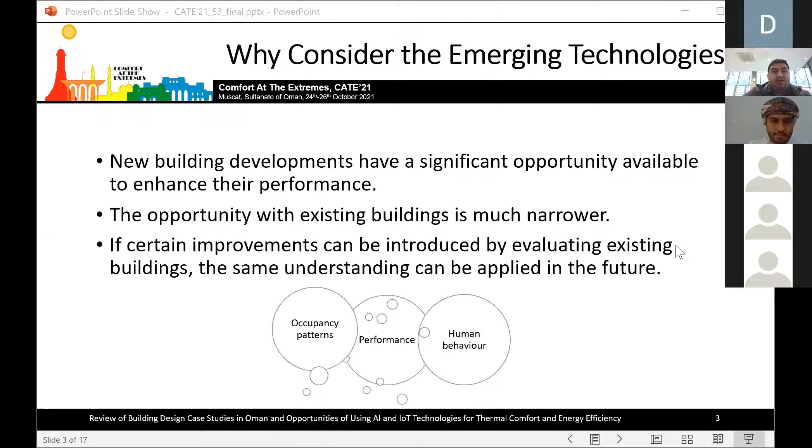So how about the past? Yesterday, John Norton presented what I can call a historical snapshot from his research in 1975. He and his colleagues traveled throughout Oman and presented the methodologies that people actually used in their houses. One of the most profound things he presented is a photo drawn by Salim, who used to live in Nizwa, of his home, and it turns out to be a completely different image. The thing he drew was completely different from his actual house.

And now we ask the same question. When we look at that past research and our current building development today, we ask where do we want this to lead us in the future, given all the issues we currently have in Oman, including energy prices, but also other issues such as natural disasters and cyclones.

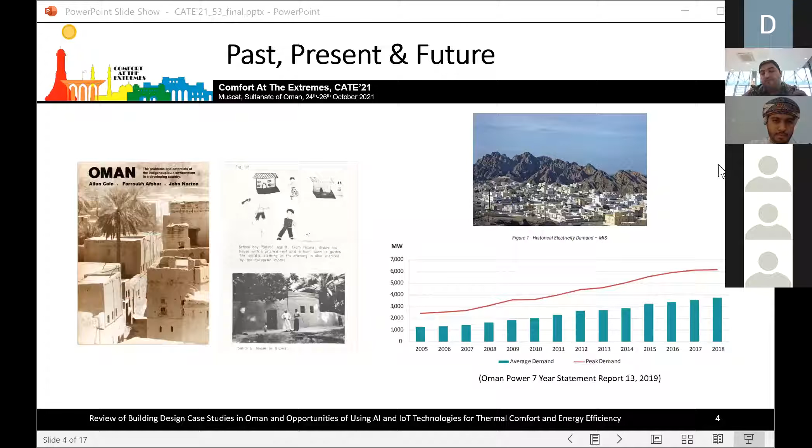I think people can agree that the modern development of buildings in Oman has not adhered to energy saving principles. This is said again and again in different reports in the 80s, the 90s, and even in some of the proposals at the end of John Norton's report. This has happened despite the success of vernacular architecture. We think that ignoring the same principle again and again will just lead us to financial burdens, and we will reach a point where it actually becomes a risk, and that's what we have to think about.

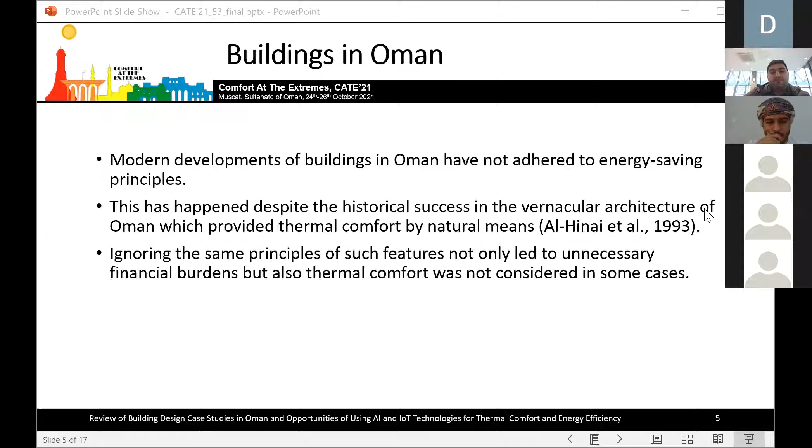We currently know that Oman has 4 different regions in terms of microclimates: the coastal, the mountainous, the southern, and the desert regions. In this map, we've reproduced this in color, and it also shows the population density around these regions.

Past research shows that vernacular architecture has different methodologies to deal with the microclimate of these regions. Now, have we used this understanding of the evolved methodologies, or have we actually ignored them? We can give an example of the public or state schools in Oman.

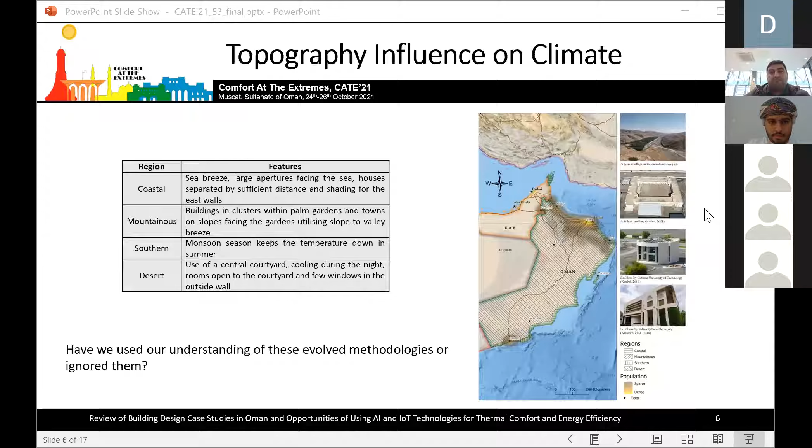We think this is evidence that the local environment or microclimate is not actually taken into account, because there are over 1,600 schools and they all follow the same design. So is it true this is based on understanding the climates of different regions, or have we decided to build them exactly the same way everywhere?

Some people are even trying to change this through education, because if we continue with the idea that we need to keep designing or building the same way, we're taking away the incentive to innovate and change. At the end of the day, we do have to improve the performance of these buildings.

In the paper itself, there's more discussion on the classroom layout and the behavior of teachers and students throughout a typical day. We can conclude that sometimes the function, the layout, and the building itself are not actually fit for the function they're supposed to serve.

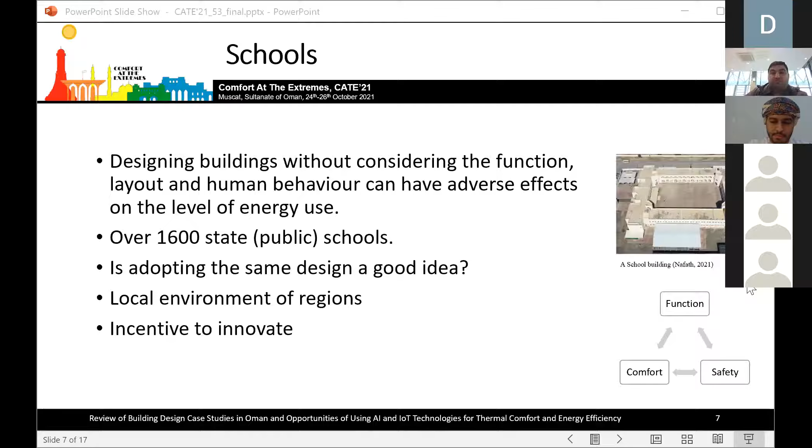On the other side, we've also seen promising initiatives. This one is an initiative by the Research Council of Oman that started in 2011 to design and build eco-friendly houses, which resulted in taking that knowledge into practice. On the right here, we can see two examples by the German University of Technology and also Sultan Qaboos University.

We agree with Professor Nikolaus Knebel, who explains that this kind of initiative breaks the stagnation - it's a stagnant kind of culture and behavior that has to be changed. We do have to stop and think. This kind of initiative doesn't have to stop here, but can also be accompanied by promoting energy utilization design methodologies by the government, by the industry, and also implementing this in education courses.

I'll stop here for now, and then Ahmed will lead you on the use of data, and why we need data and how we can take that into practice for current developments and buildings.

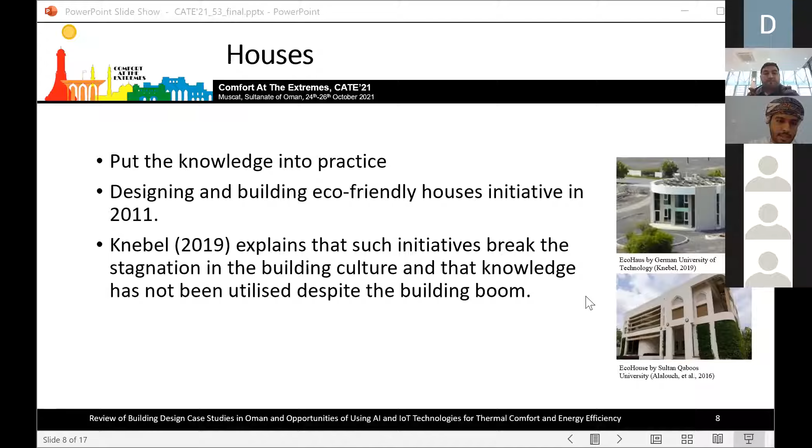This kind of data right now in Oman is not really accessible to the public. Usually we'll have to contact certain bodies such as airports or certain organizations to get access to it. When we look at this, we can see that we have 2 rising or emerging technologies that can really build upon and improve the current situation.

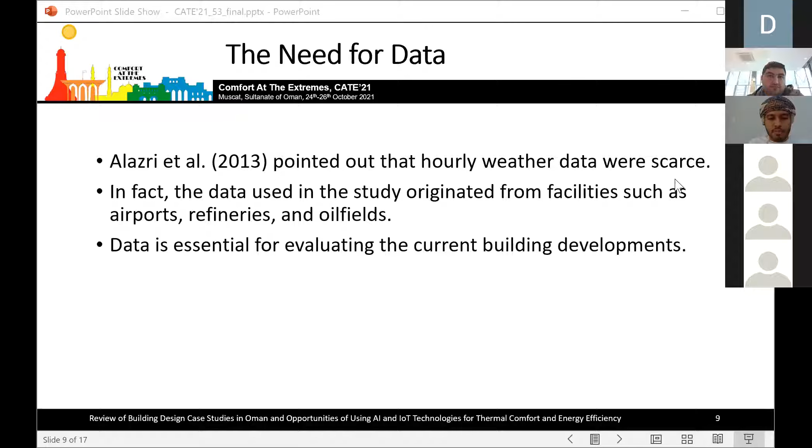This allows us to drive comfort-driven and energy-aware systems, mainly using machine learning as an optimization tool to properly set the parameters for our heating, ventilation, and air conditioning systems. This data can be easily gathered through an Internet of Things system - basically a network of different sensors in a specific layout to get reliable, close-to-real-time data.

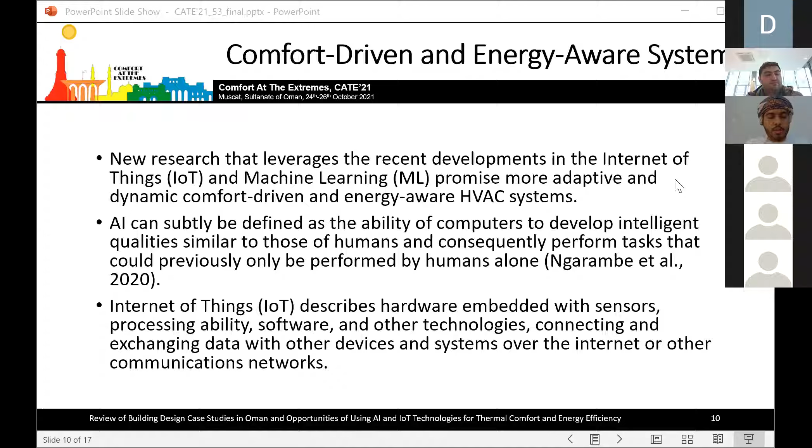If we look at the next slide, we can see several factors that affect our thermal comfort, and there might be even more than what we see in the figure - ranging from activity level to the ambient temperature outside, to what I'm wearing. All of these factors need to be put into a mathematical representation, and this representation needs to be really accurate and fit the kind of techniques we're using, which we'll discuss on the next slide.

Before that, we have two models, the PMV and the PPD models. These are basically indexes to the occupancy map and the thermal comfort of an individual inside a building.

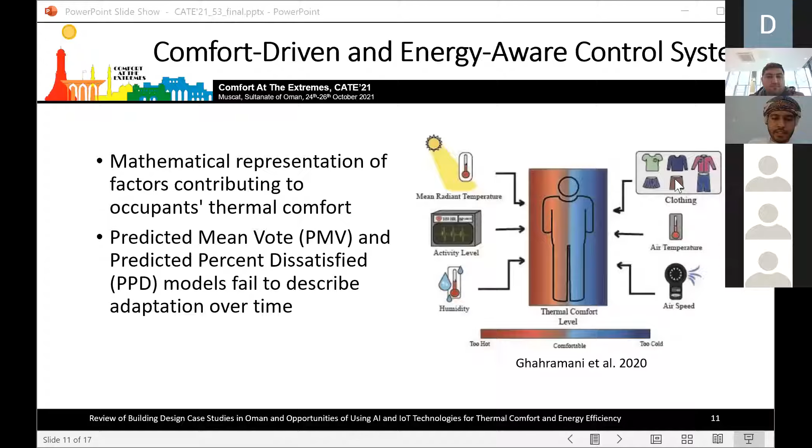We can see that AI has been used as an optimizer in one of the applications, and additionally it can be used as a predictive control to define temperature ranges based on historical trends in the data and the seasons. Most of the architectures we've seen used are those with temporal features that can adapt over time. Bringing such a system is similar to the analogy of PID controllers—a controller based on a neural network with the benefits of weights and biases to optimize it even better.

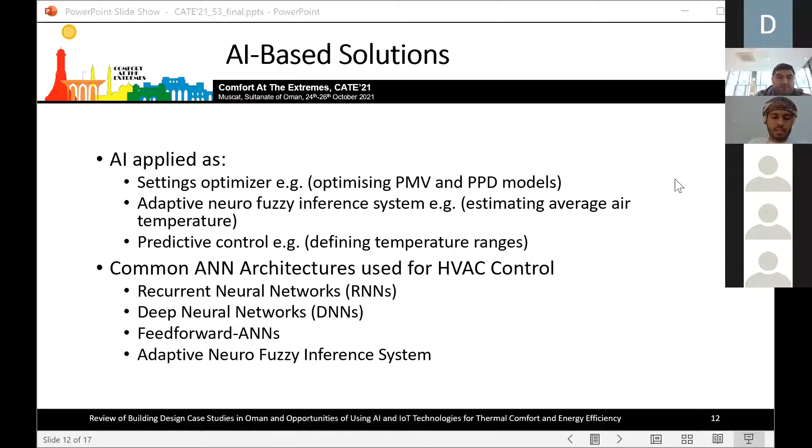Lastly, this can give us a system like a heat map for the occupants, letting us target the active zones where we need to control the heating, ventilation, or air conditioning systems. Combining all of that, we've come up with a framework to help implement such systems, from the sensor layout to the kind of data you can get and the insights to drive the control of heating and ventilation systems.

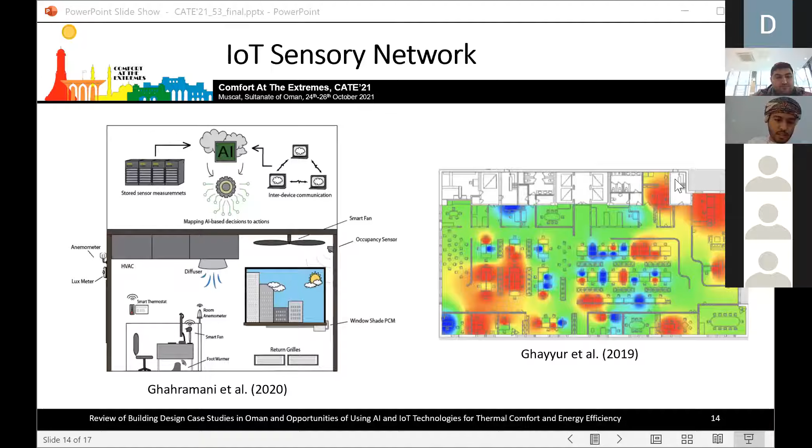Reaching the end of our presentation, we have a few questions we believe can spark discussion: Are we actually applying the research and understanding from this work in building development in Oman? How can these results and insights be communicated to relevant parties—government, education institutes, or industry? And can we make this communication even faster? Thank you for your attentive listening, and we look forward to your questions and discussion.

I cannot pronounce the name exactly. No problem, my name is Eusébio Conceição. Okay, welcome, can I start my presentation? Yes, please start it and upload it. So we have the second presentation, about a numerical study of a smart HVAC system using human thermal physiology control, and you have 15 minutes to present your work. After the presentation we'll have a question panel, after another presentation. Please go ahead.

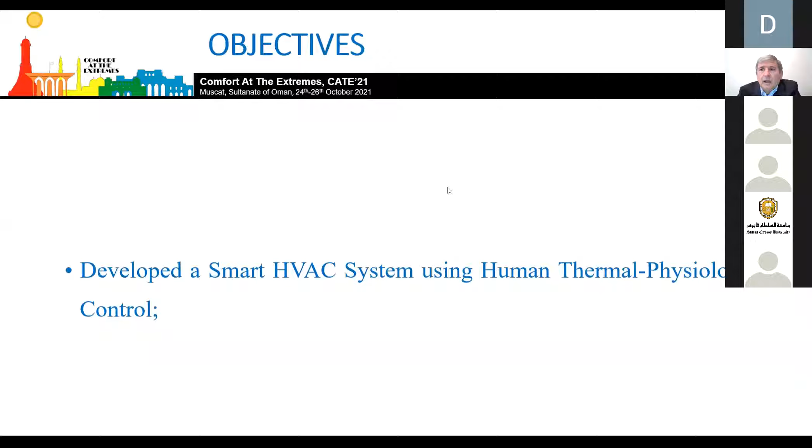Traditional systems use air temperature; in this case, I use human thermal physiology as control in order to guarantee better comfort levels in occupied spaces. I will analyze the influence of different HVAC powers, evaluate the thermal comfort in order to control the systems, and also evaluate the indoor air quality in the space, because it's very important to guarantee thermal comfort, but also very important to guarantee indoor air quality.

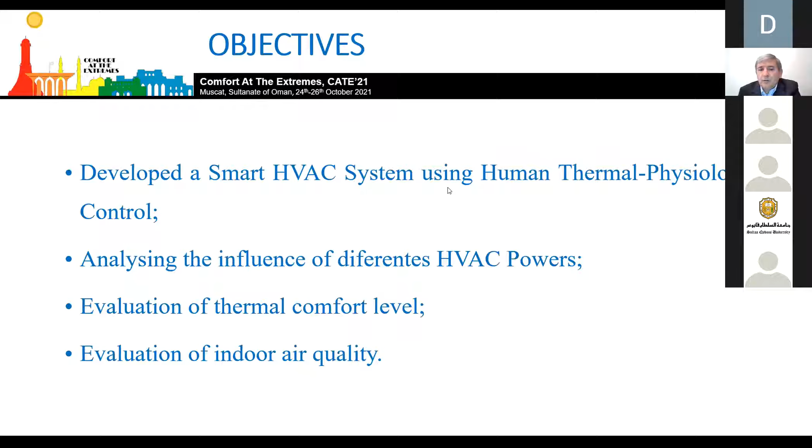So the first step, I will present the numerical model. It's a software developed by my team over the last 10 years that simulates the building, the occupants, and the CFD—a complex software. I will show the building and the human thermal response. The building is divided into 3 parts: opaque, transparent, and interior bodies. We consider all the heat exchange phenomena: convection, conduction, generation, mass transfer with renovation, transpiration, and radiation—a great group of thermal phenomena.

In the opaque surfaces, the opaque material is divided into different slices. It's very important to guarantee a temperature distribution inside the opaque surfaces similar to reality.

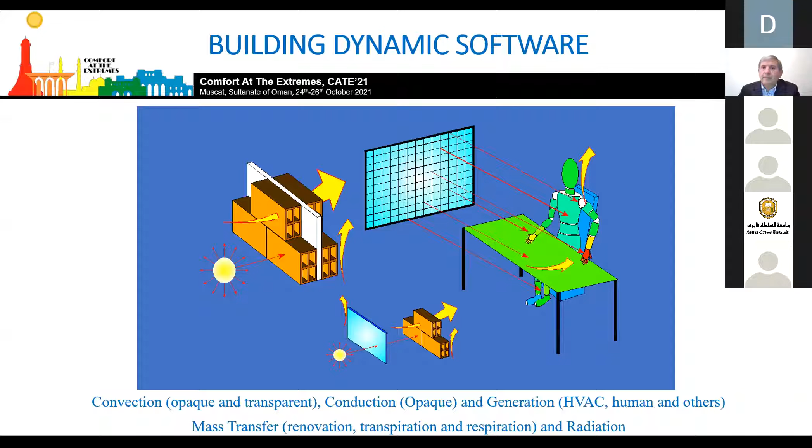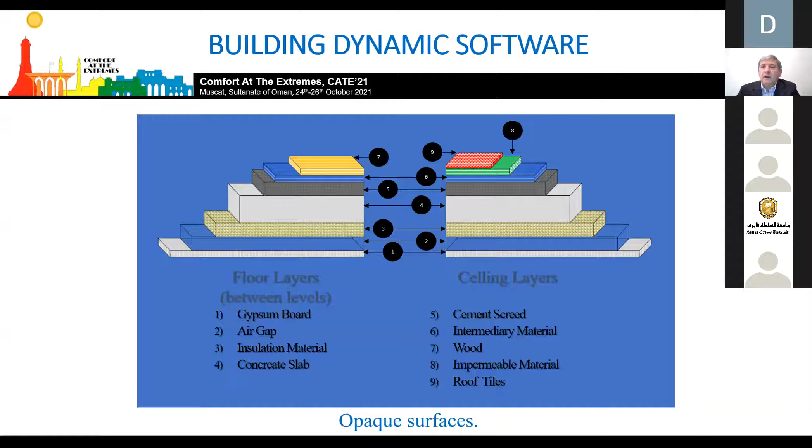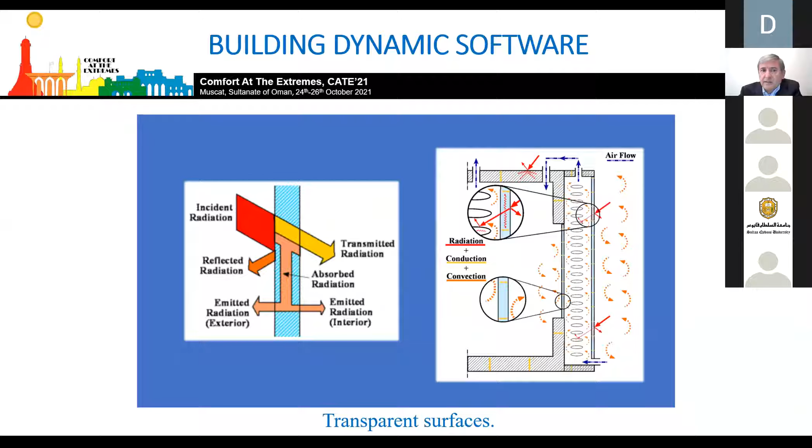Another important part is the radiations. It's very important to calculate the external and internal solar radiations, and also the heat exchange between radiations for each space. The numerical software considers the solar radiations during the day, and considers outside and inside the space all the shading devices used, in order to guarantee a calculation of solar radiations for each opaque or transparent surface similar to reality.

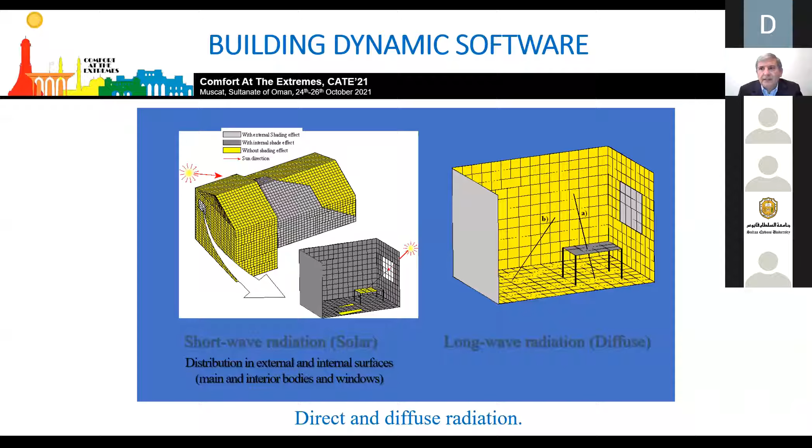After that, another important part is the equations. In order to make the simulations, it's necessary to introduce energy balancing equations and mass balancing equations. All the equations are resolved using the Runge-Kutta method with error control. It's a very interesting resolution system, because it reduces the time and reduces the errors during the simulations.

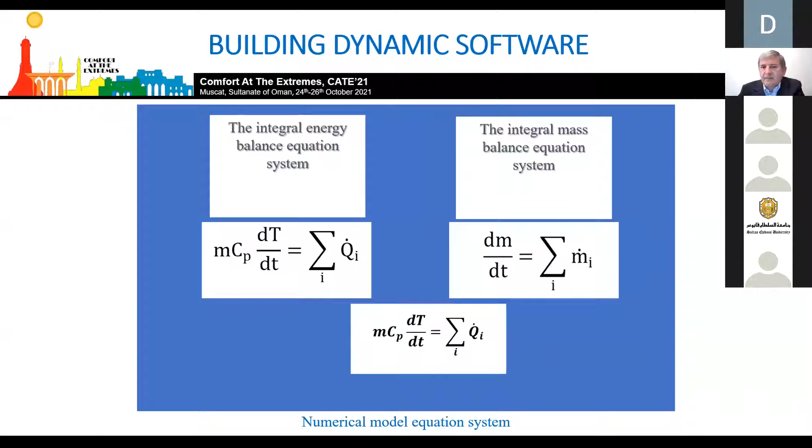So in order to develop the equation systems, I use a philosophy, a design, the CAD, computer aided design. All the building is designed in the computer, and then the computer itself, using the design, generates all the equations. For the opaque surfaces, it generates all the energy equations. For the transparent surfaces, inside the spaces, and also generates the mass equations that are very important to calculate the carbon dioxide concentration and water vapor inside the space. That is used to evaluate the indoor air quality.

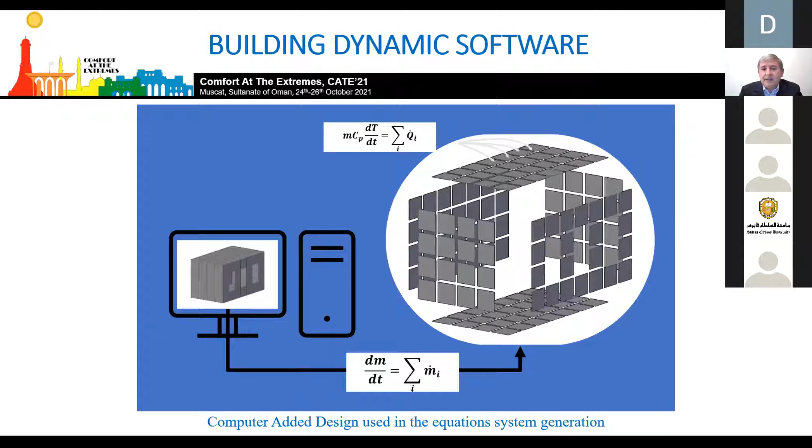So in order to evaluate the thermal comfort, the numerical software simulates the human body thermophysiology. It considers the occupants divided into different spaces, different elements, and all the variables are considered. In general, the heat exchange between the human body and the surrounding surfaces is used to evaluate the PMV. That depends on different variables, such as air velocity, mean radiant temperature, relative humidity, air temperature, clothing level, and activity level. And others, like radiations, are also considered in this case.

So in order to guarantee thermal comfort, the international standards divide it into 3 parts. For me, it's more important to use category C in this work, in order to guarantee that the predicted percentage of dissatisfied people is lower than 15%. In this case, the PMV, predicted mean vote, changes between minus 0.7 to 0.7. Minus 0.7 is very important in winter conditions because lower powers are used in this case. And for summer conditions, PMV equal or lower than 0.7 is used.

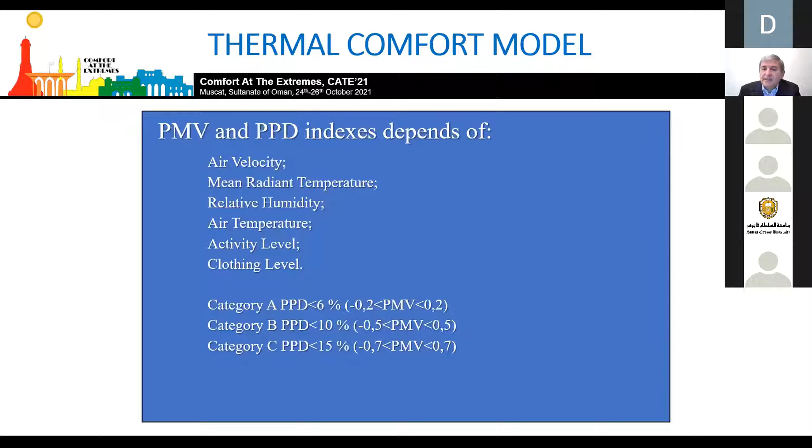In my case, I will show one situation. I use PMV lower than 0.7 because it's summer conditions. So then the numerical software has a group of inputs and a group of outputs.

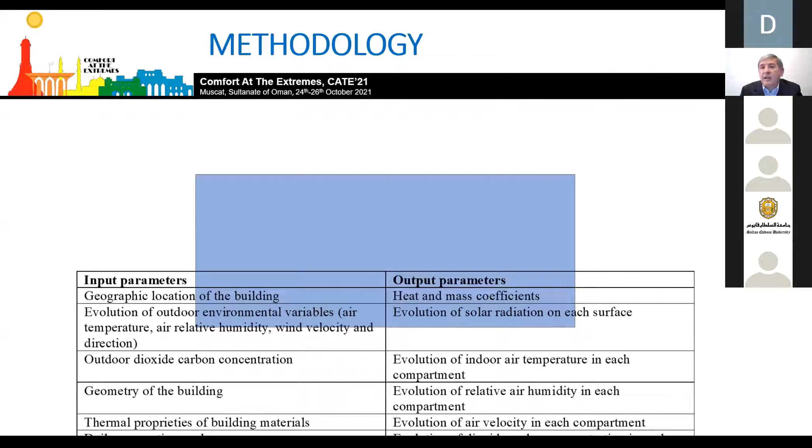As input, there is the geographic location of the building, evolution of surrounding variables that can be calculated numerically or experimentally for air temperature, air relative humidity, wind velocity, wind direction. The carbon dioxide concentration is also very important. The geometry of the building using CAD, the thermal properties of the building, the occupancy cycle, the clothing and activity levels, and the air ventilation topology used during the day.

So the output is all the coefficients: the radiations, air temperature, air relative humidity, air velocity, carbon dioxide, thermal comfort, power, and air quality. So it's a group of situations.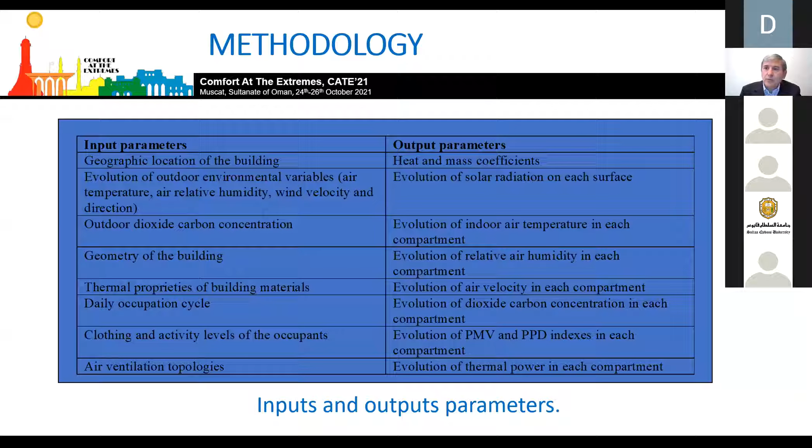In this case, I use an experimental chamber, similar to the experimental chamber that I have in my laboratory. There is a small chamber with 3 windows turned to south, and I will analyze 3 kinds of situations: the first one without heat ventilation air conditioning, the second one with heat ventilation air conditioning at a middle power, and the third situation using heat ventilation air conditioning with the highest power possible.

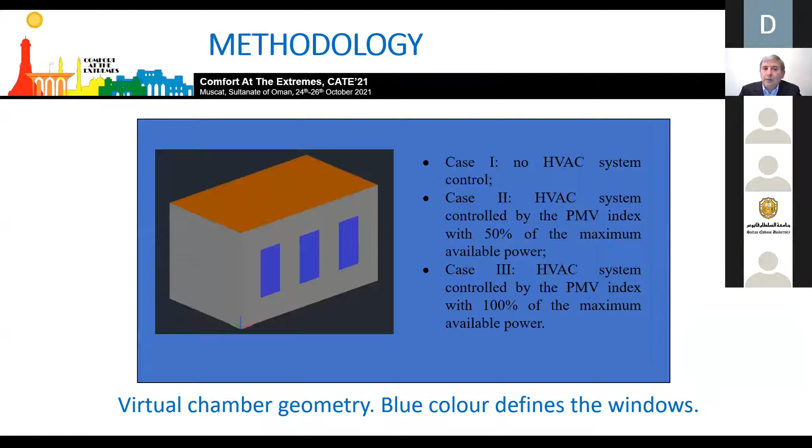So I will show the dimensions of the chamber. There are 3 windows turned to the south. There are occupation cycles because people enter and leave the space during the day. I use summer situations with Mediterranean conditions. The occupant activity is 1.2, and the clothing, typical summer clothing, with 0.5 clo. I use as input the air temperature, relative humidity, wind velocity and direction for a typical summer day.

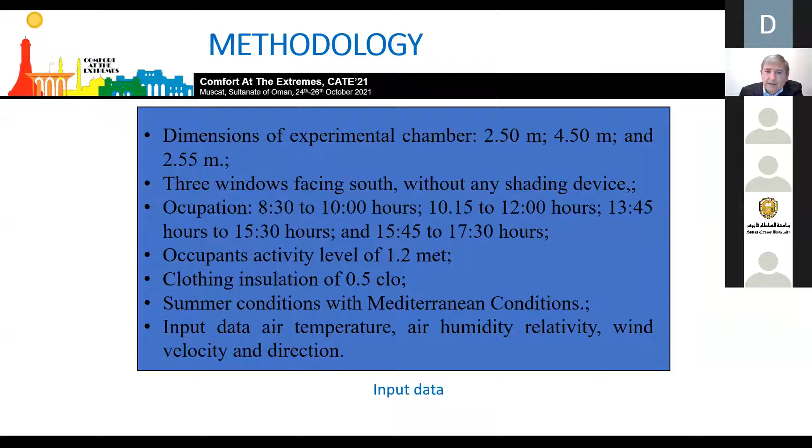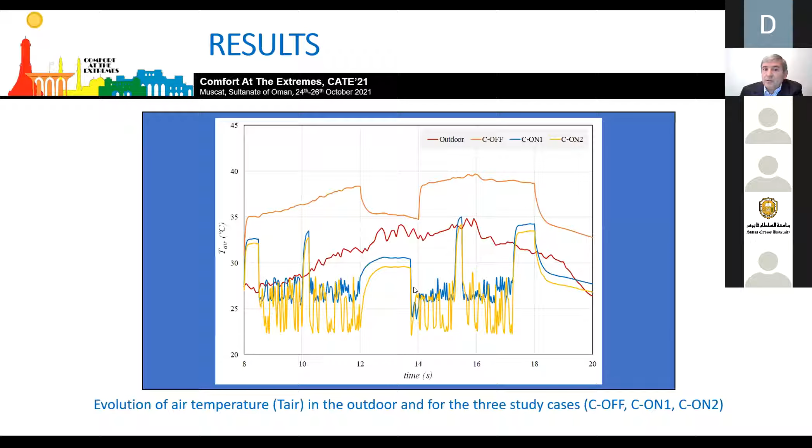Next, I will show another parameter used to calculate thermal comfort: the mean radiant temperature, calculated by a numerical model. It's very important to control the temperature, and you can verify there are higher temperatures without control, but smaller temperature variations when I use full control at 100% power, shown in yellow. In blue you can verify the other situation with middle power.

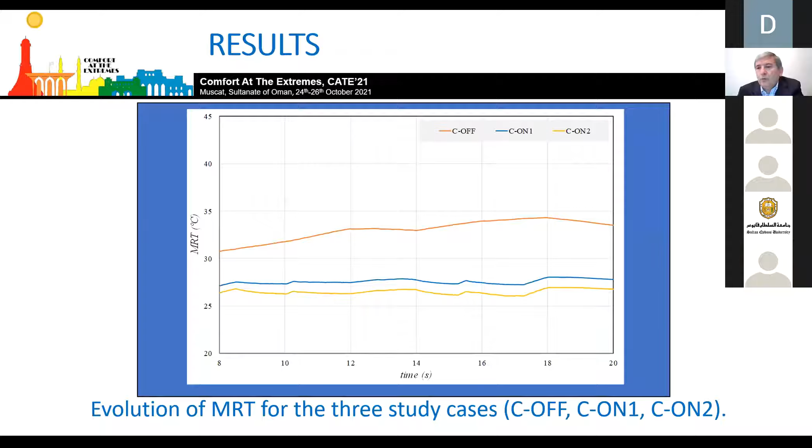Finally, I'll show you the evolution of PMV. The first line, with higher temperature, is the evolution of air temperature without control. It's not acceptable. However, the two controlled situations guarantee PMV near 0.7, which is an acceptable value for winter and summer conditions, and acceptable for category C of the international standards.

So you can verify using yellow: when I use the maximum power for the ventilation air conditioning, thermal comfort is guaranteed and is lower than 0.7. However, when I use middle power, you can verify that the PMV is in general around 0.7.

However, sometimes it is a little higher than 0.7. So in the yellow situations, using maximum power, I can verify that thermal comfort is acceptable during the day.

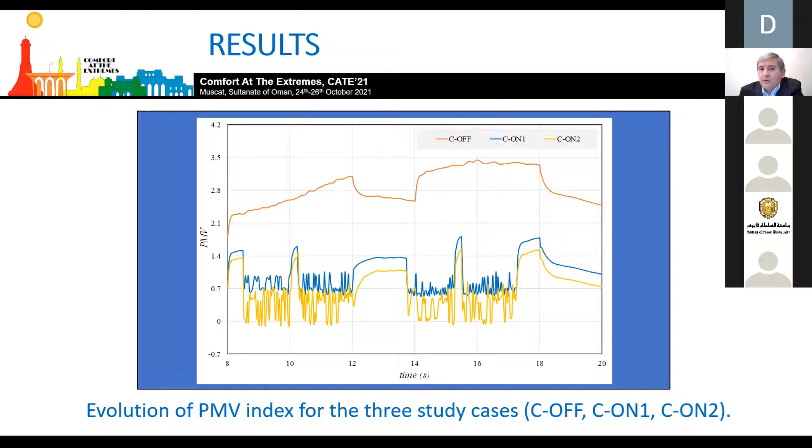To conclude my presentation, I'll show the power levels I used in my simulations, the higher and the middle, when the ventilation air conditioning works. This is the representation of the powers.

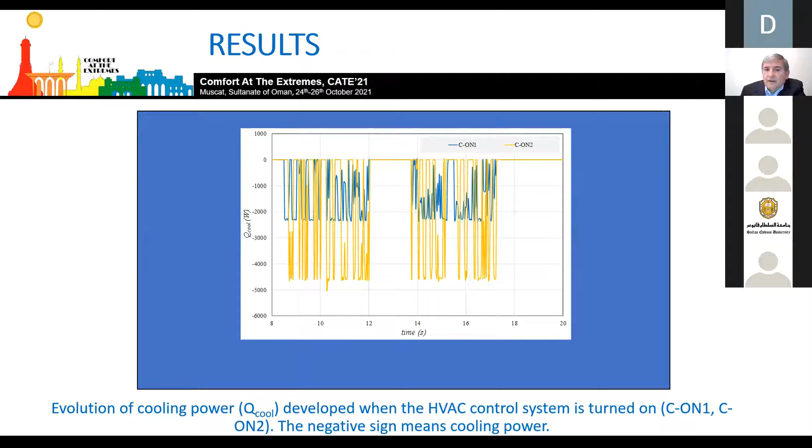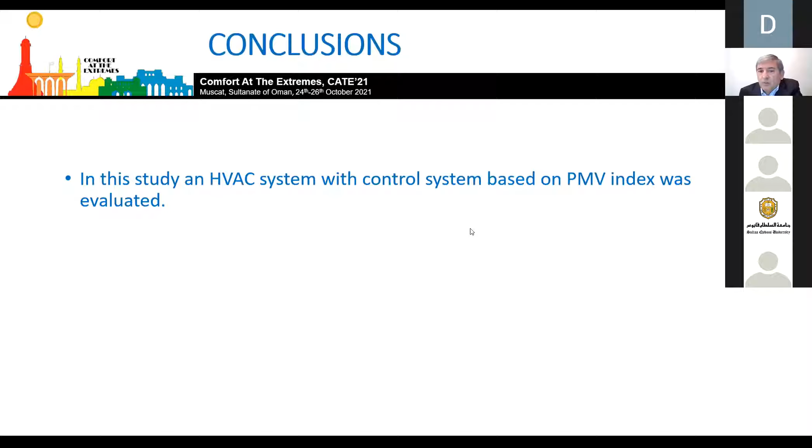The control system with maximum power guarantees better levels of thermal comfort for the occupants and fewer uncomfortable hours than system 1 with middle power. The lowest thermal energy consumption is obtained with control system 1, which guarantees the best compromise between lower energy consumption and acceptable thermal comfort levels.

In the future, I will use my university's different buildings with HVAC systems, and apply this kind of system in different buildings in order to guarantee better comfort for the occupants.

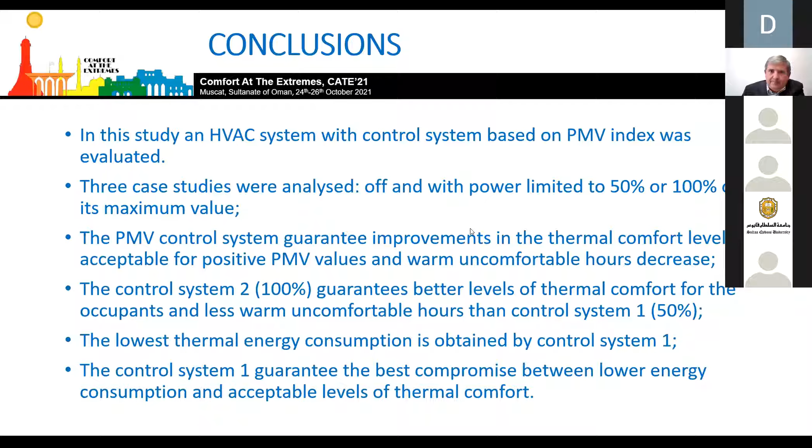Okay, thank you very much. The second presenter, I don't know whom... the third, Dr. Sayed Shah? Yes, I'm here. Shah, is he available? Can you hear me? Okay, yeah, could you please share your presentation?

Sure, let me share my screen. Can everyone see my slides clearly? Just to max. Okay, fine.

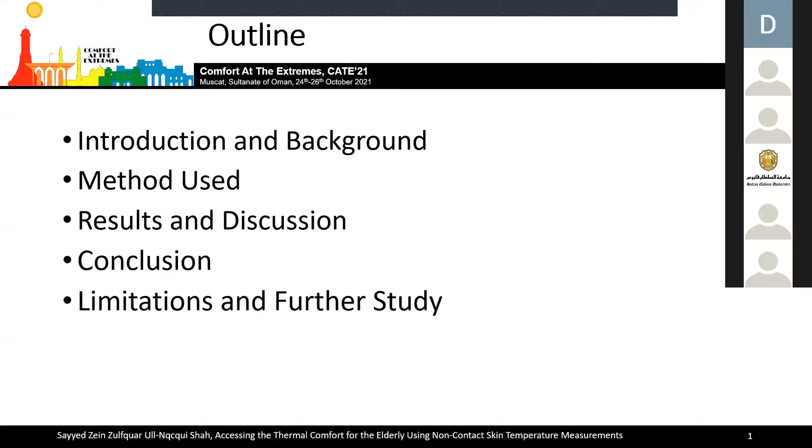The elderly are the fastest growing demographic in the UK and are expected to represent 24% of the population in the near future. Many are, however, unable to adjust their thermal environment due to loss of autonomy from age-related illnesses such as dementia. Many building regulations are based on research conducted on young adults and their requirements. However, recent studies have shown that the elderly prefer warmer environments, and as they spend 90 to 100% of their time indoors, it's important that more research is conducted into their needs and requirements.

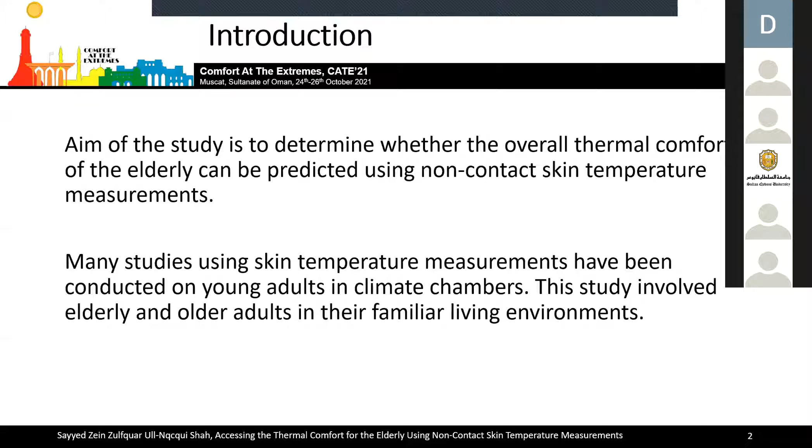So what we built on to help construct this project was that studies have already shown that skin temperature measured from the hands can predict thermal comfort to a high accuracy.

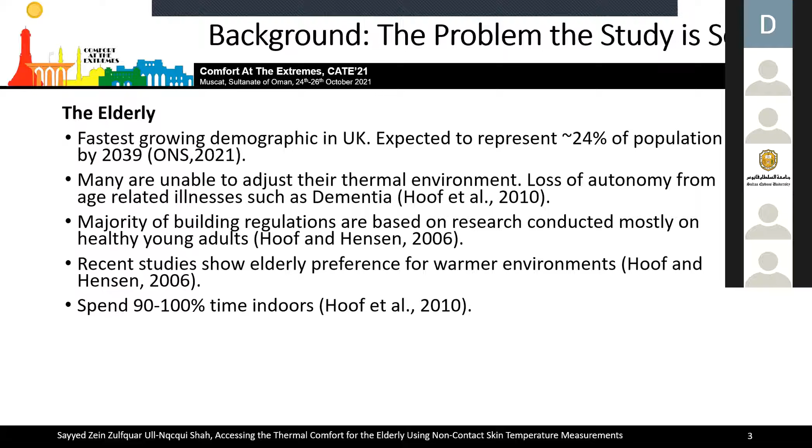Thermal imaging can take accurate measurements from a distance, minimizing disruption and distress to users. Studies have found skin temperature is not affected by relative humidity under normal room temperature. All of this combined opens the possibility of designing a personalized comfort model with minimal user input.

Two studies were conducted for this research. The first involved 7 retired elderly residents from the Lyle Court Care Home in Edinburgh, UK, aged over 70. The second involved 5 older adults working from home in individual home offices in Örebro, Sweden, aged 45 to 75. Both studies had mixed gender participants.

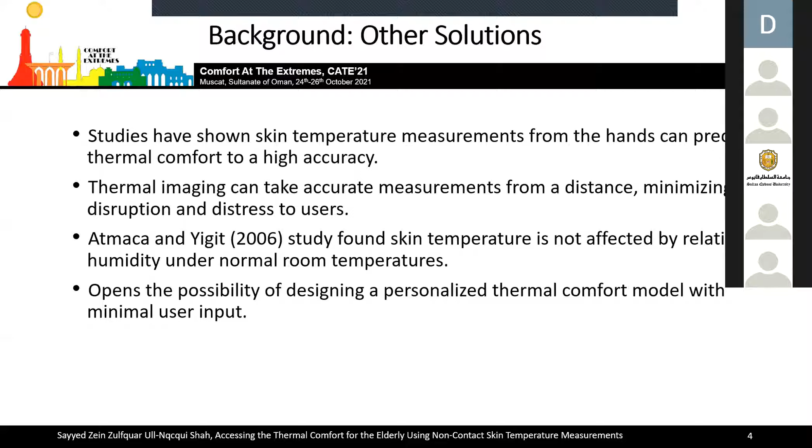Objective variables were measured from the occupants and their rooms, and subjective indicators of thermal comfort from the occupants using a questionnaire based on the ISO standards shown below. Measurements were taken during the participants' daily winter routine in familiar environments, and everything was done to minimize stress or affect how they do their day-to-day activities. Contact was minimized, with measurements taken at a distance out of the participant's line of sight.

Room temperature was increased over time in the home office study in Sweden. However, the same was not done in the care home study due to concern of the change in room environment affecting the elderly participants. No restrictions were put on the participants, but both were advised to refrain from food and drink consumption during the measurements, and also to limit their activity.

In the questionnaire, three questions were asked to the participants. First, their thermal sensation vote: how do you feel about the temperature at this precise moment, using the scale below, from cold at -3, to neutral, to hot. Then, thermal satisfaction.

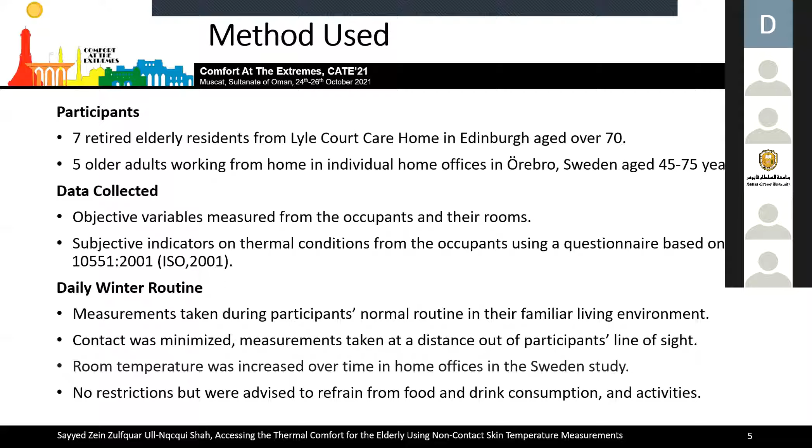How do you find the room temperature, using the scale below, from 0 being comfortable to -3 being uncomfortable. And also the thermal preference: how would you prefer the room temperature to be, using the scale below, from much cooler to much warmer. You can also see below the equipment that was used for the study.

We used a data logger, which was placed in the room away from any equipment that would interfere with it, and also in any way that would affect the participants. A thermal imaging camera, shown below, was also used to take the readings.

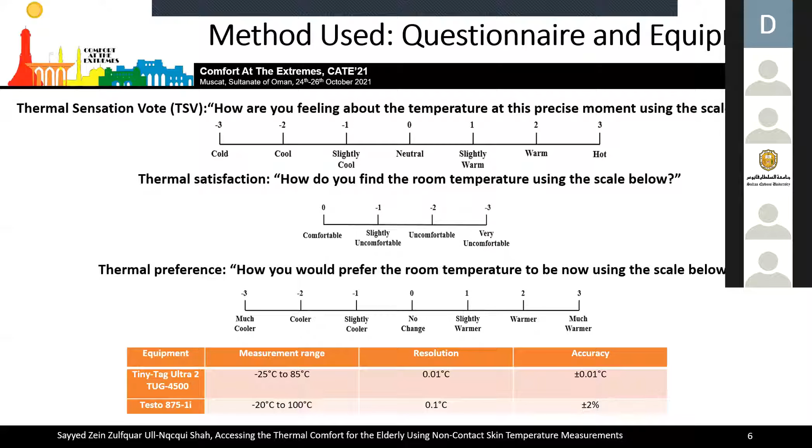The elderly were not restricted and wore clothing of varying insulation values and performed light activities, and this likely accounted for the lower R² value compared to the home office study, where the older adults were restricted due to working requirements, stationary at a desk, and wore light office clothing. The lower room temperature required for the elderly to have the same hand temperature as the older adults is likely due to them having warmer clothing.

This also links with Olson's study, which had similar correlation but required a much higher room temperature to reach the same hand temperature as the participants in both my studies. This potentially is because his participants were naked, wearing far less clothing.

With the thermal satisfaction vote, the room temperature was found to have a lower correlation, with an R² value of 0.14, compared to the R² value of 0.74 in the home office study. This is likely due to participants being aware that as time went on, the room temperature was increased.

In Chowdhury's study, participants had a range of clothing insulation values and no correlation was observed, similar to the elderly in the Lyle Court care home study.

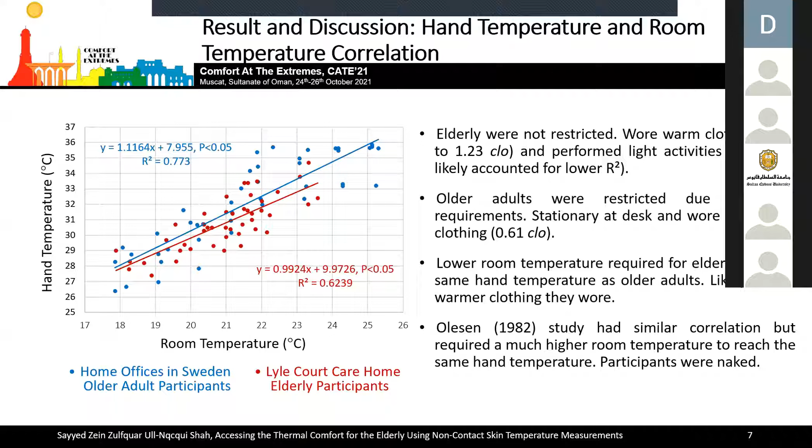Wang's study showed participants wore warmer clothing and required a hand temperature of only 30 degrees to feel thermally comfortable, compared to the home office study with the older adults, where it required a higher temperature and they wore lighter clothing. With thermal satisfaction, the preference for room temperature was in line with building regulations of 20 to 24 degrees, but at the higher end.

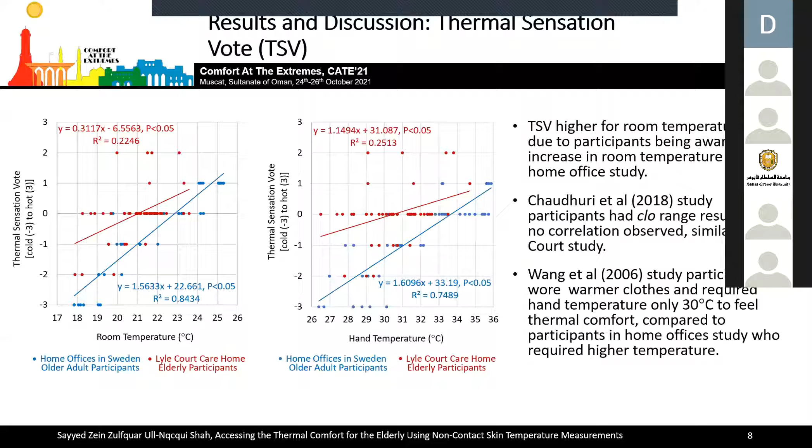Hand temperature was found to be a better indicator of thermal satisfaction, and the hand temperature required for thermal satisfaction was also in line with the previous findings in the home office study with the older adults. This pattern is again seen in thermal preference, with hand temperature being a better indicator than room temperature, and again participants preferred a room temperature on the higher end of the building regulations.

So, in summary of the findings: the hand temperature measurements through a non-contact method was significantly correlated with room temperature.

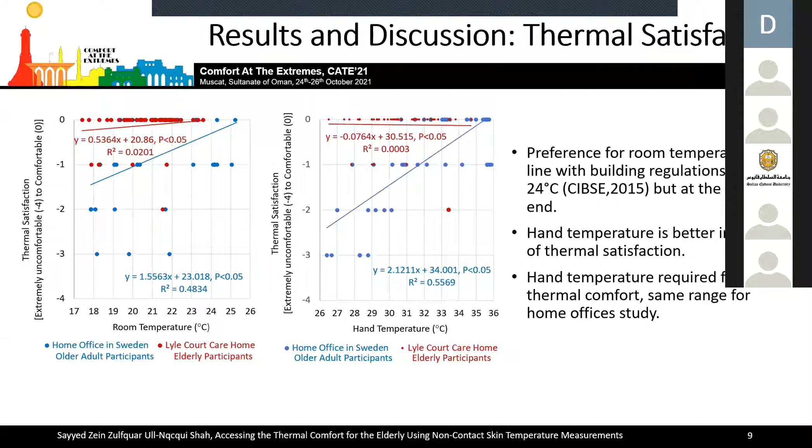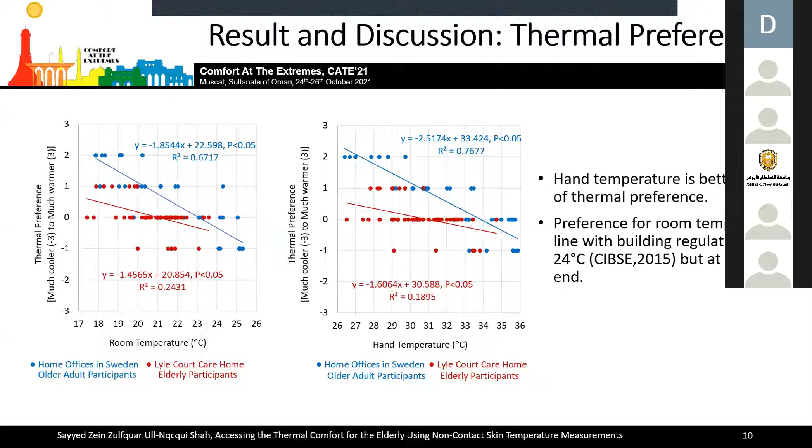Clothing level had a significant effect on hand temperature and subjective thermal comfort and their correlation to room temperature. The hand temperature was significantly correlated with thermal comfort when participants had the same clothing insulation level. So to conclude the findings, the research suggests that hand temperature measured by non-contact methods could be an indicator of thermal comfort for an occupant if the clothing level factor is applied.

The limitations of this study were due to the small sample size, COVID-19 restrictions limiting what could be done, the lack of detailed recording of the clothing worn by the participants, and the study being at an early stage.

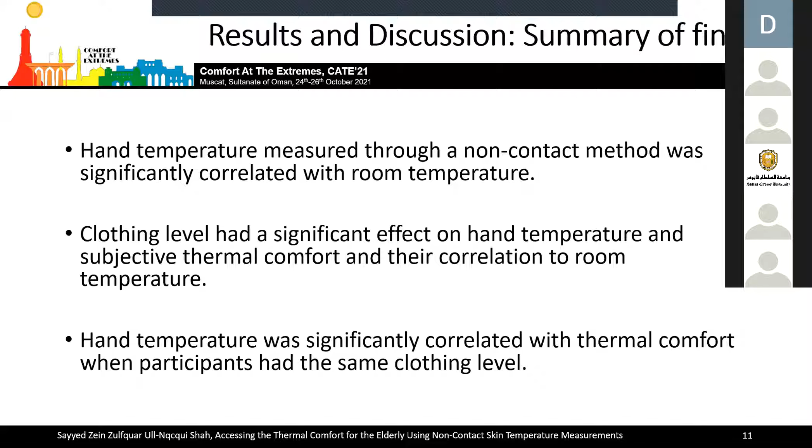In a future study, we'd like to build a better model for predicting thermal comfort in an older population. A larger sample size would be required to do so, along with a clothing factor applied.

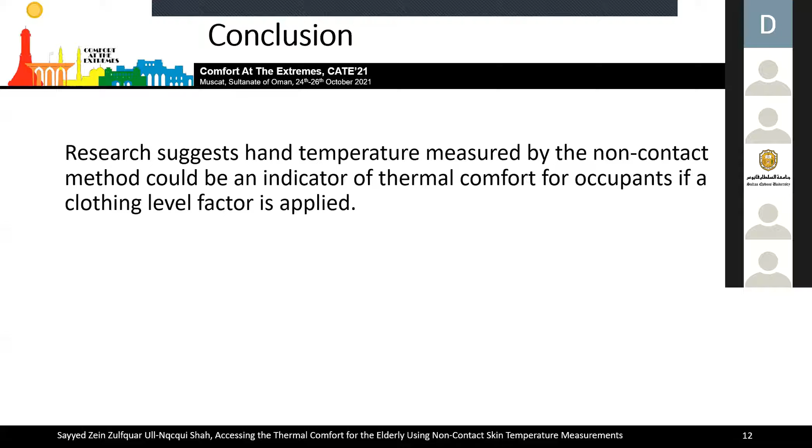The future application of this model is that it could allow a smart heating system to achieve automated control of individual comfort and energy efficiency by tracking the palm of the hand, clothing, and movement of the occupants, creating improved quality of life, especially for users with limited autonomy.

Thank you for listening to my presentation.